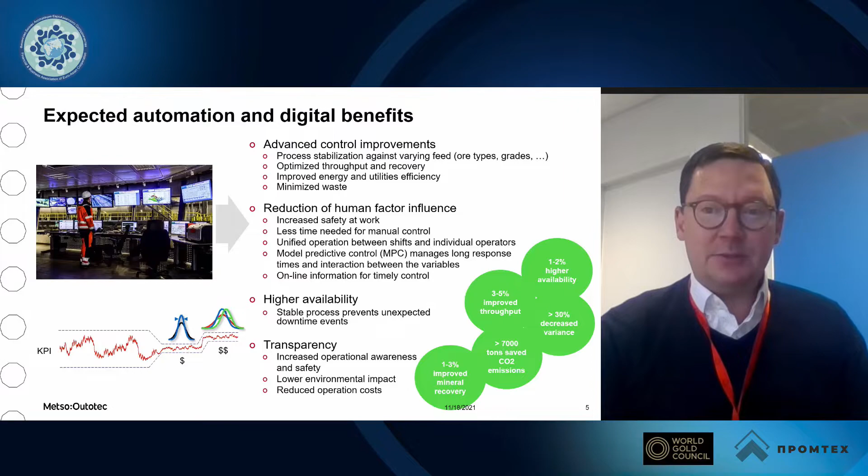By proven results, we mean that we have references and measured customer cases where we can show these results happening.

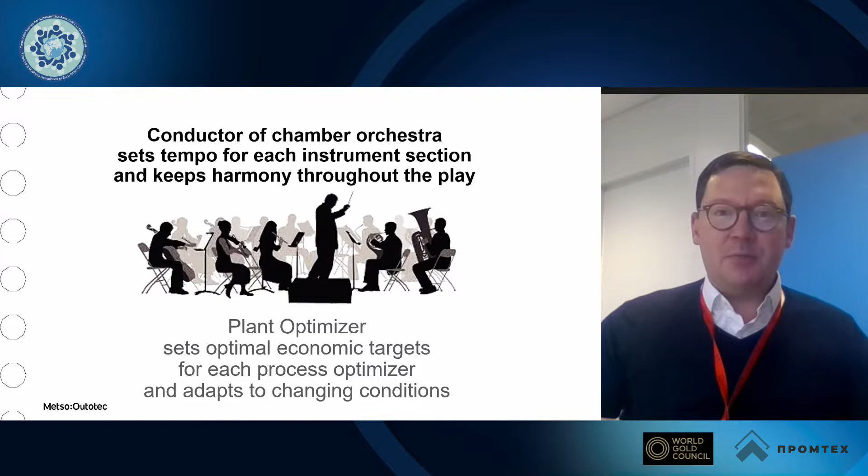A plant optimizer can be compared to a conductor of a chamber orchestra, who sets the tempo for each instrument section and keeps harmony throughout the play.

Such a conductor of an orchestra can be a plant optimizer, which is a metallurgical digital twin. This metallurgical digital twin relies on different process optimizers, each delivering the process optimum and the results expected from them.

So a plant optimizer simultaneously and continuously adapts to the targets to achieve the optimized output.

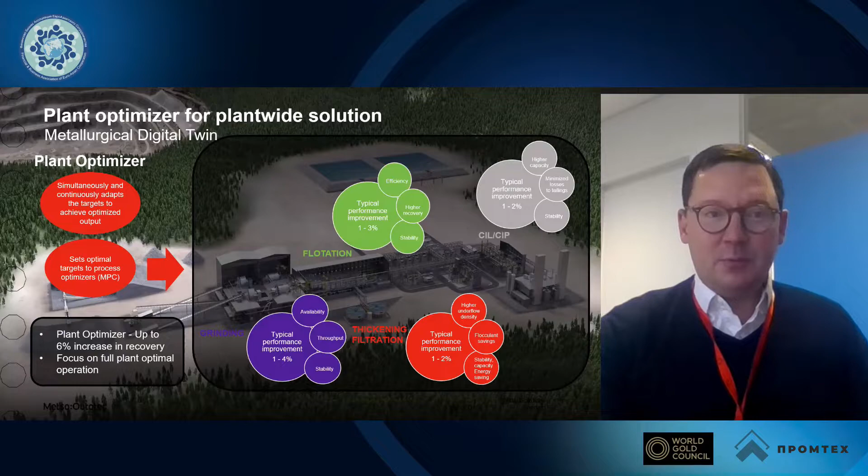Then we can introduce the metallurgical process twins, as a digital twin is a digital representation of a real-world entity. It is a software object or a model that mirrors a unique physical object, by definition.

A metallurgical digital twin as a plant optimizer measures raw material, process state, production value and costs, and of course inputs that to the process optimizers.

Now, when we introduce the digital twin to the control of the optimizers, we can get feedback from the process and input that back again to the real life plant, where we can predict and optimize the process further.

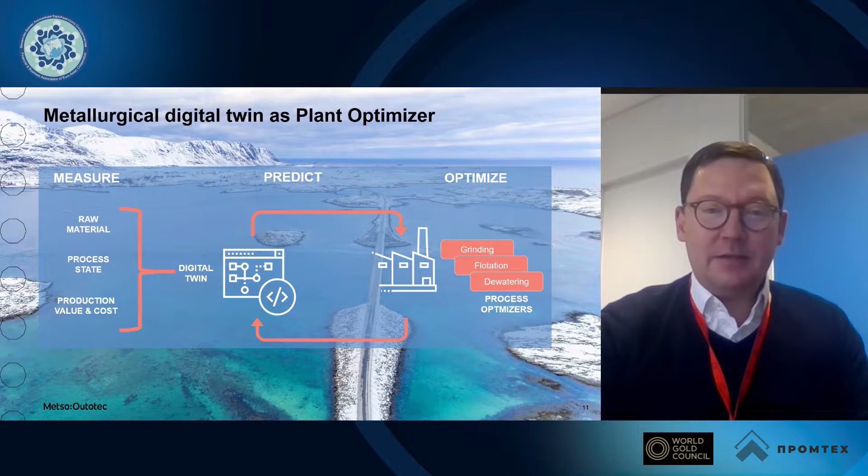When looking at a real life example, we can see what it looks and feels like. So we have different measured and proven scenarios and models of how the real life plant works at different optimums.

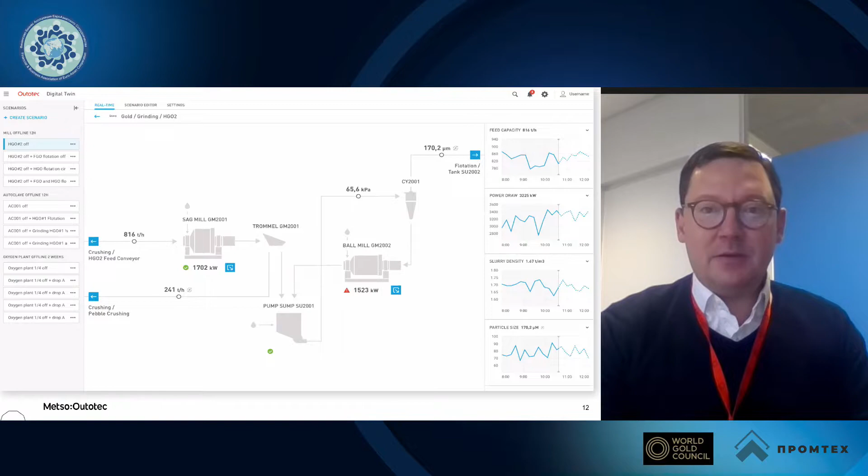And we can run the plant and measure it online, in real life. So what we do is create a static or dynamic process model, which is adapted online to track the plant response.

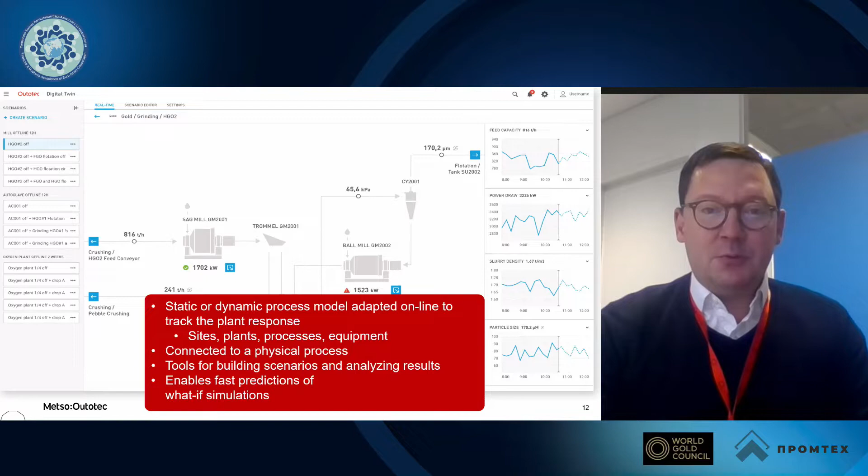The model is connected to the physical process, and we provide tools to build scenarios and analyze results. This enables fast predictions of what-if scenarios and simulations.

We can, of course, measure the process history, but with the dynamic models and the digital twin, we can predict what happens if we change something in the process. This prediction is accurate, as the digital twin is a replica of the real life plant.

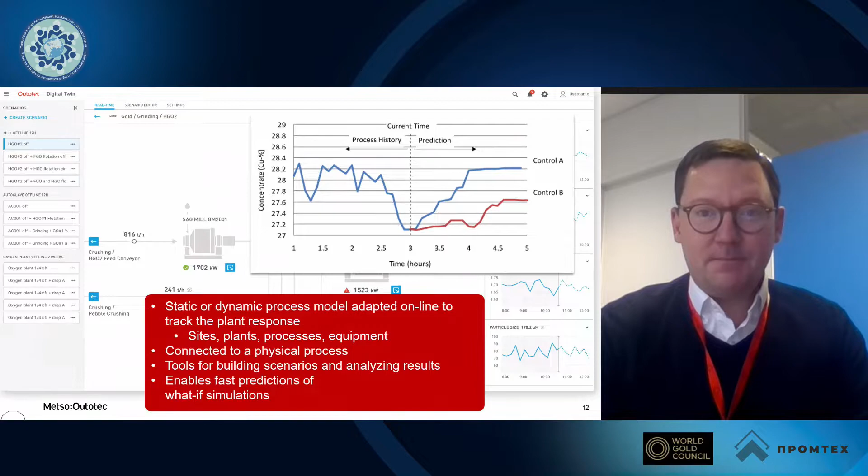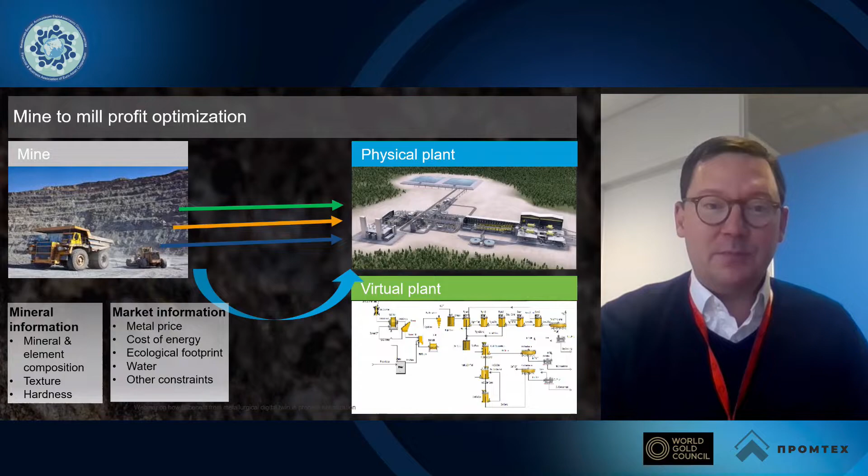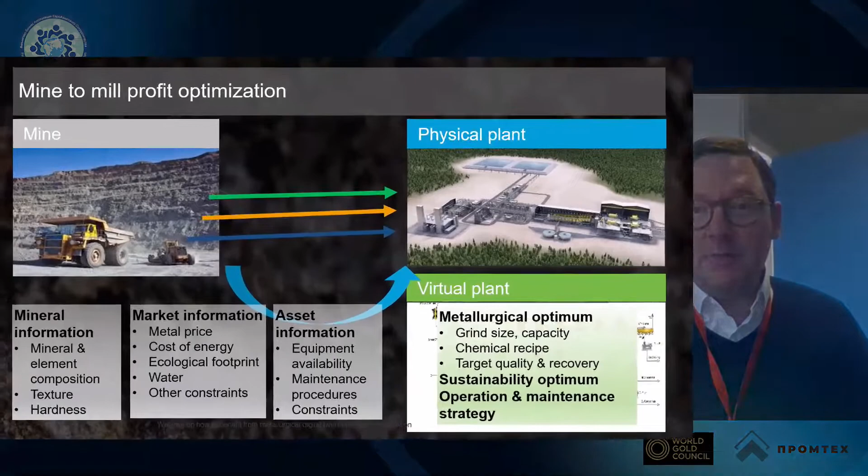The mineral information, the mineral and element composition, texture and ore hardness, market information like metal price, cost of energy or reagents, ecological footprint, water availability and other constraints, and asset information is delivered to the virtual plant, where we reach the metallurgical optimum and sustainability optimum, whatever that might be in the specific case.

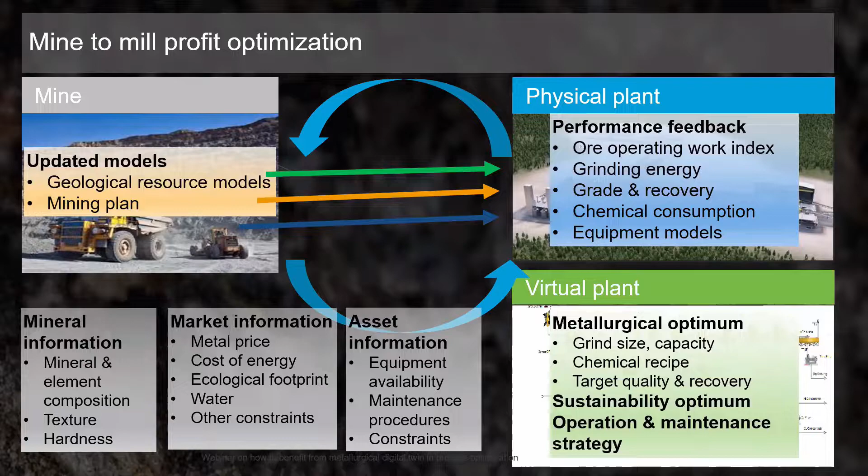From the physical plant, we can get performance feedback, and again, in the mine operation, update the models in the geological resource models and mining plan. I believe you have received the presentation from Sandvik covering exactly this part of the optimization.

And this results in the economic optimization of the site, or the operation, or the company itself.

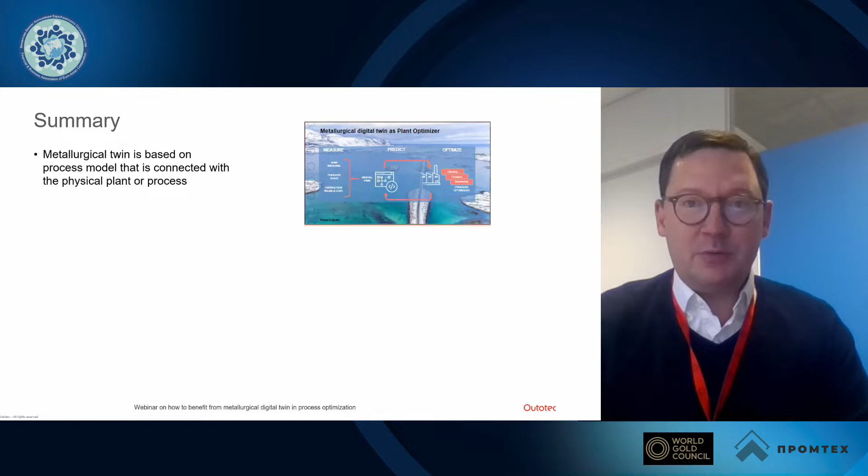So as a summary: the metallurgical digital twin is based on a process model that is connected with the physical plant or process. The metallurgical digital twin can be leveraged in versatile plant optimization tasks and therefore has significant value generation, which is possible through operations efficiency improvements.

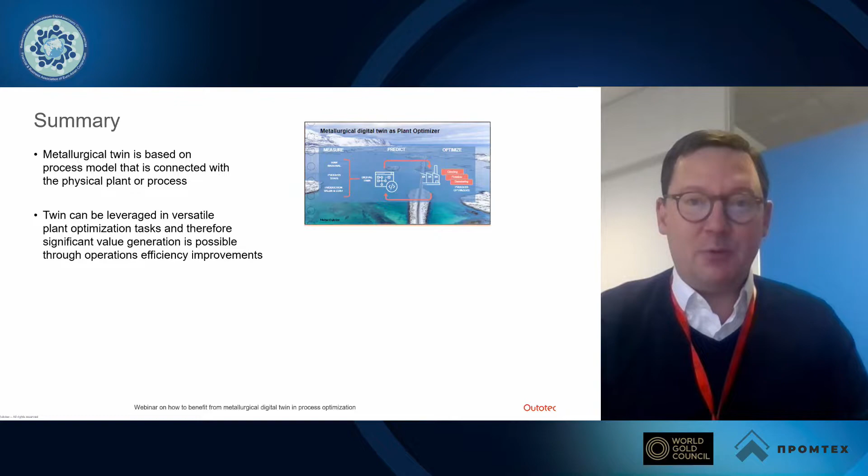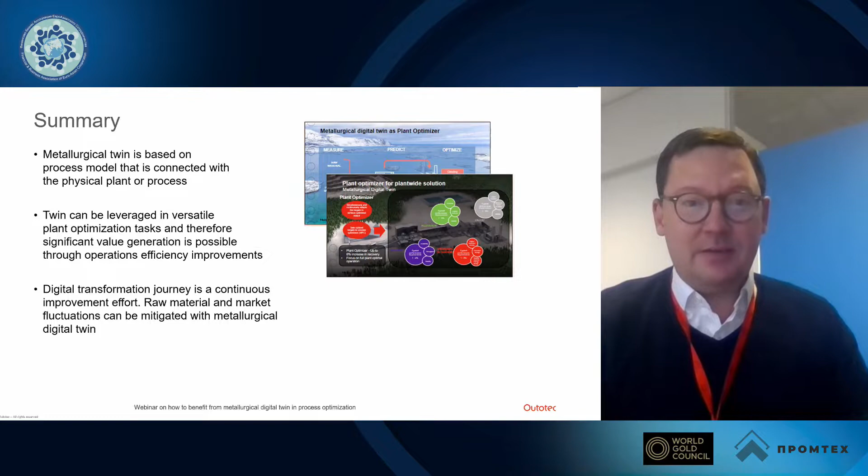Important is that digital transformation journey is not a one-shot investment. It is a continuous improvement effort. Raw material and market fluctuation can be mitigated with a metallurgical digital twin, and as a result, economic optimization for the site and business can be gained.

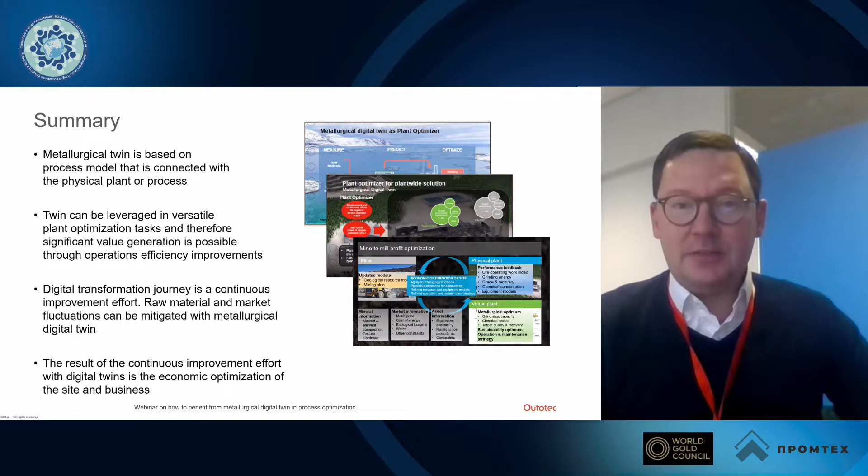This is a very short 10-minute presentation and a brief teaser for the metallurgical digital twin and what we can do with such technology. We are delivering this technology at the moment. This is not science fiction. In Russia, we already have several customer cases ongoing where this kind of technology is being implemented.

Thank you very much. And as always, I'm happy to receive any questions.

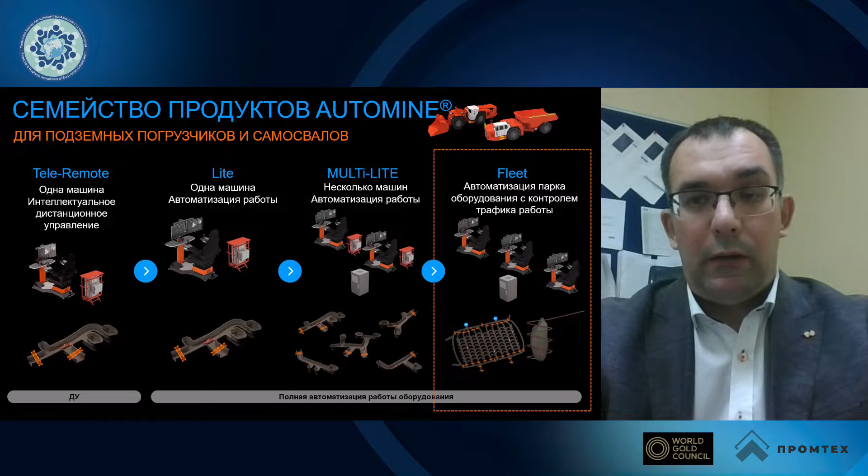We also have solutions for automatization of the drilling equipment, and this direction is also developed by us. The decision can be as simple as remote control of one unit, when the operator is constantly sitting and distantly controlling the work of the truck. It can also be fully autonomous work of the vehicle, when the operator just puts the end point of movement and the vehicle moves through the mining channel, making the program function.

This year we also launched the first project in Russia, in Norilsk Nickel - 2 trucks, and they work.

If we talk about Norilsk Nickel, it's too early to talk about results - we just implemented the system. But I can give examples of implementation at foreign facilities and companies. There is a most picturesque example of the benefit: this system on a gold ore site in Canada returned the investment back in 54 days.

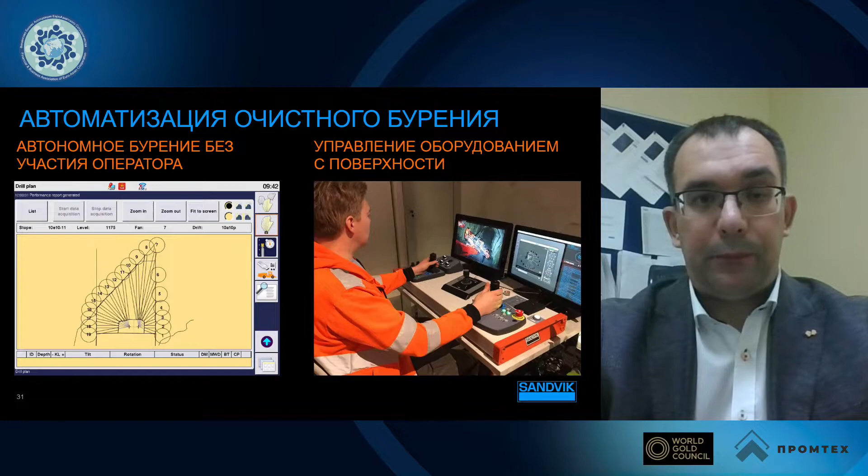In conclusion, I should say that Sandvik is developing, at the present moment, a new concept of the automatization system - an absolutely new type of equipment. It will be in 4 or 5 years. It will be a totally new vehicle, a new type of equipment. It will not be equipped with a cockpit for the operator - from the very start, it's supposed to be under the AutoMine system operation.

It will be equipped with sensors for 3D navigation. This means it can perceive the environment in a 3D model, and then be able to work together with people who are at the same block, at the same horizon. It will be equipped with AI intelligence.

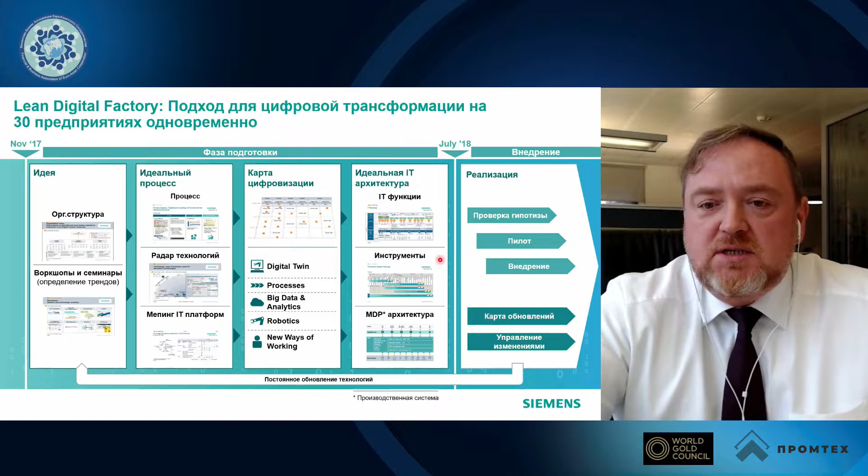Here you see all these 5 working flows which were mentioned on the previous slide. We established the ideal IT architecture, how we would like to see that, and we discussed all the tools which we need for the implementation.

We defined what is most important - the architecture of the production system, how we will measure all this, how it will be controlled. In 2018, you see that practically we needed 1 year for the preparation, and we moved to the implementation after that.

The implementation goes through the standard methods: the hypothesis check, the launch of the pilot project, and the enlargement of implementation on the whole factory.

But we understand that time goes fast. We have new technologies. That's why we always consider the map for update, and the update, the new technologies, brings us back to the thoughts and repeats the process. If we have something new, something that is significantly changing, this is the way we have undergone, and what we face, what we see.

For me, this turned out to be a revelation, because if we compare the structure of our costs before the digital transformation and after, it looks like this. Per unit of the product, material expenses were 65%, and 15% were direct costs of our personnel, then 5% for engineering, capital expenses, and other expenses. So this was the structure of expenses - about 80% of our product costs were variable costs connected to the produced equipment, and 20% were fixed costs which did not depend on the amount of issued products.

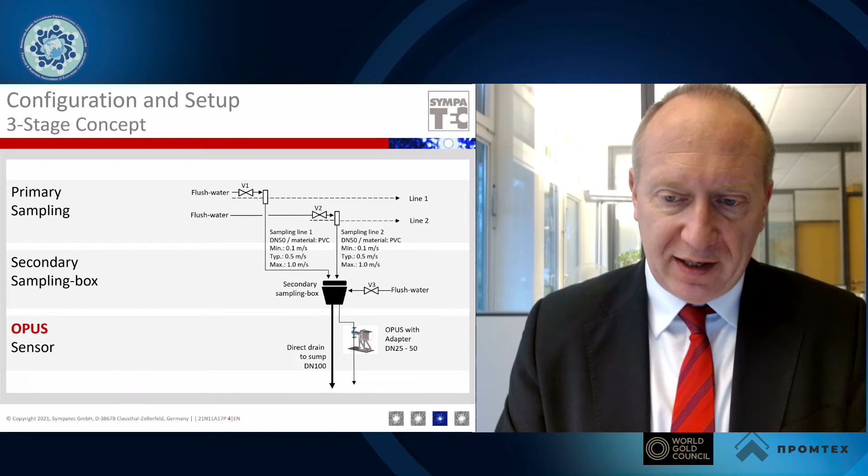Typically, the configuration of our equipment and setup is a three-stage concept. We have a primary sampling where the sample is taken from the process line, for example after a hydrocyclone. Then the sample is transferred to the secondary sampling box, and from there a part of the flow passes the online particle size analyzer, which is based on ultrasonic extinction. The entire system looks like this.

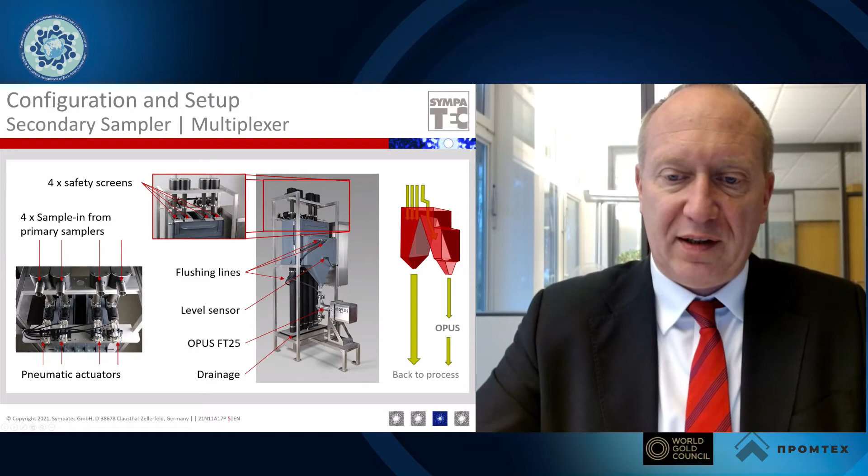You have a so-called multiplexer, which is used to connect the online analyzer to up to 4 streams. So you have the sample inlet, flushing lines, level sensors, and the Opus sensor that does the online real-time measurement.

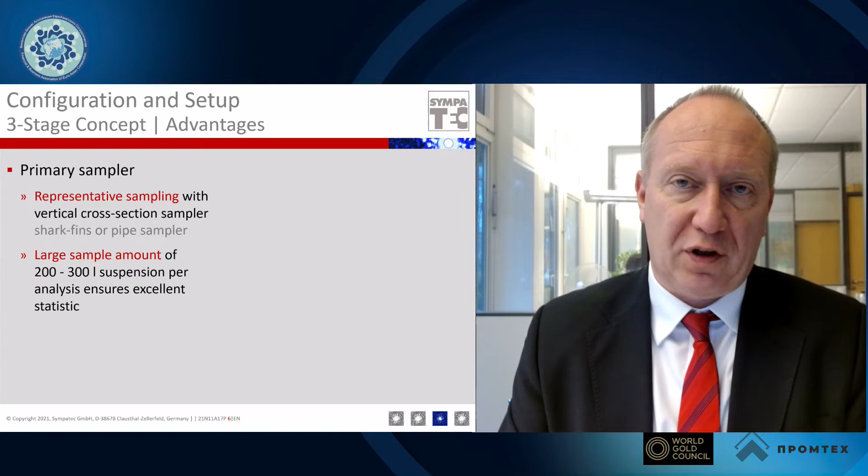With this 3-stage concept, we have certain advantages. The primary sampler ensures you get a truly representative sample via a vertical cross-section sampler - these can be shark fins or pipe samplers, with different options. This gives us a very large sample amount, something like 200 to 300 liters of suspension for each analysis, ensuring excellent statistics.

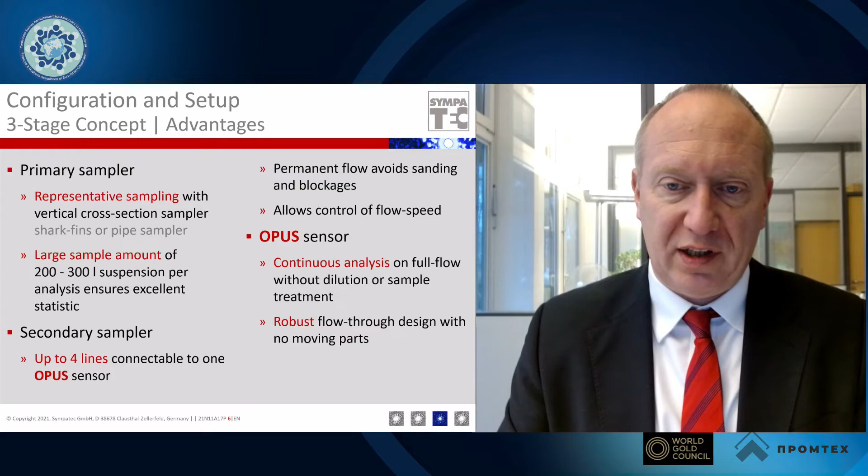The secondary sampler is basically a multiplexer that connects up to 4 lines to the Opus online particle size analyzer, ensuring we get the correct amount for analysis. We have a permanent flow without any stop, avoiding sanding and blockages, and with a multiplexer we can control the flow speed through the analyzer. The Opus sensor measures continuously, giving real-time information on the full flow without any dilution or sample treatment. It's a very robust design with no moving parts for dilution or abrasion or anything else.

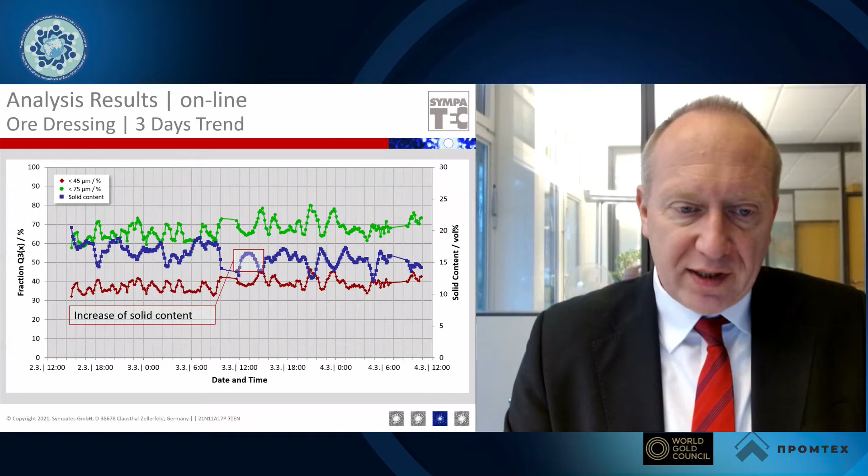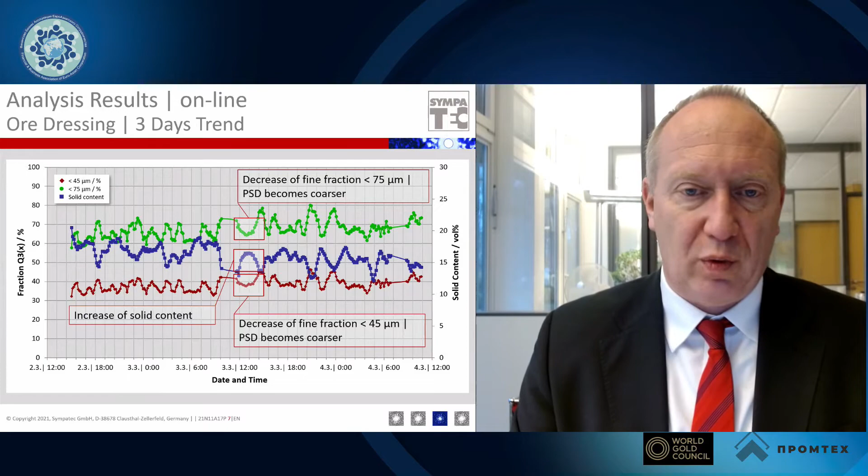Here you can see at this point in time, for example, the solid concentration has been increased, and an increase of the solid concentration immediately decreases the fine fraction and also decreases the 45 micron value. That means the particle size distribution becomes coarser. With this knowledge, you can interact - you can play with the process parameters you control to bring the particle size distribution, the fineness, into the range needed for the subsequent stage of flotation or whatever comes after that hydrocyclone.

From the previous slide, we observe that an overloaded mill - if you increase the solid content too much - can be detected, and you immediately see the particle size distribution values decrease, meaning the entire product becomes coarser. So as a conclusion, overcharging a mill with too high a feed rate at constant energy generates lower mass-specific comminution energy, which reduces mill efficiency on the minerals. If the solid content and particle size increase, this may influence the efficiency of the subsequent flotation, and there's always a danger of sanding the flotation cells.

But using online particle size analysis can clearly avoid this kind of thing from happening, because you have online monitoring that helps you avoid those process disturbances.

So very often we are asked, how does the online particle size analyzer Opus, which is based on ultrasonic extinction, correlate with other technologies? Very often people are using sieve analysis, and here you see how we can match the Opus system with existing analytical technologies, for example, sieving.

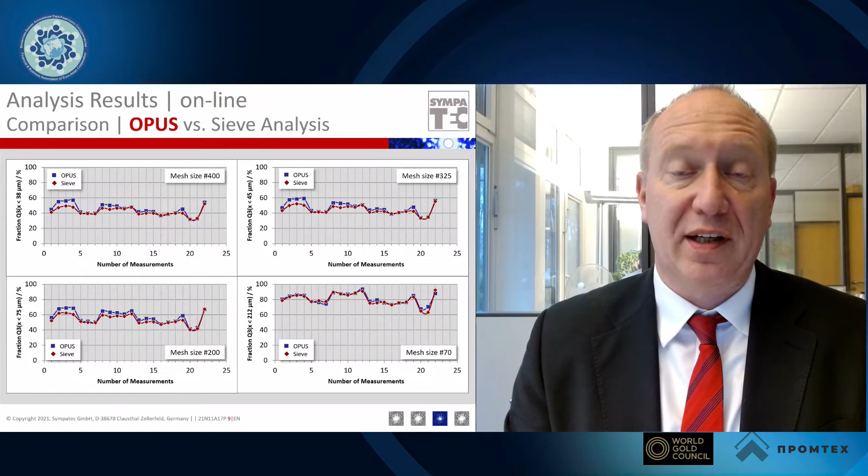So here we are looking at the number of measurements as a trend, and we are comparing the Opus results to sieve results at certain mesh sizes. You can see that the match between those different mesh sizes is really excellent, for 400 mesh, for 325, for 200, and even for 70 mesh. So we are able to match the Opus result to something that our customers are used to, which is known and already established.

There are very interesting or very important application strengths when it comes to measuring online particle size distribution for ore dressing. So we have this three-stage concept with the Opus that allows measuring particle size and solid content in real time to control the process.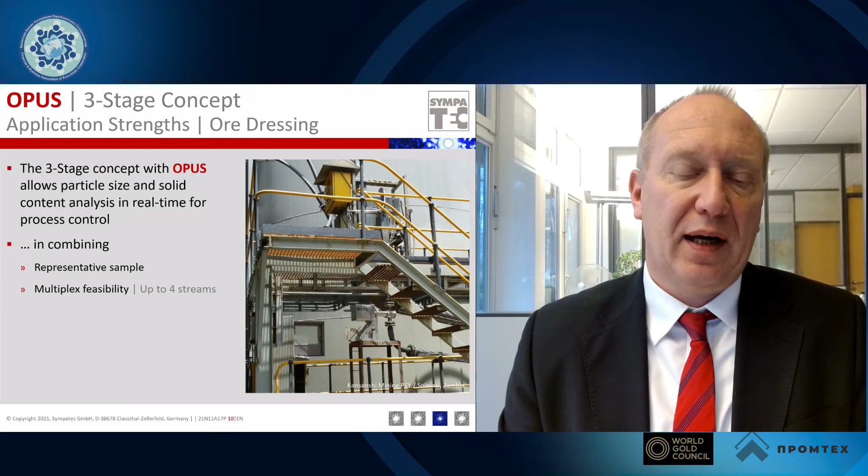And this can be combined with representative sampling, which is very important because our customers usually have more than one stream. They can use the multiplexer to connect up to 4 streams with this multiplex feasibility. The entire system has a very robust design, so it's designed to be operated in a harsh environment. The installation is rather simple and the handling as well. We have very good comparability to other established methods, for example sieving.

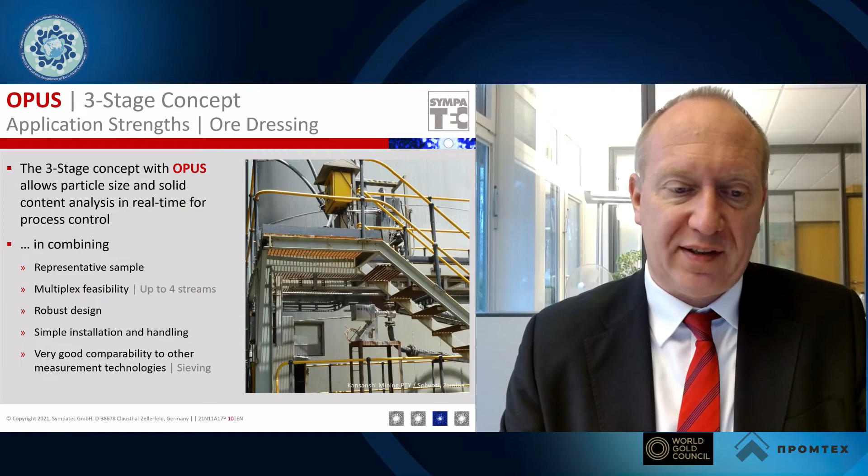I'd like to extend this invitation to see us here in Clausthal-Zellerfeld. We are open for visitors as far as this is possible under the current restrictions regarding traveling, but we are very welcoming here to visitors from all over the world. So welcome to our Pulver House, which is the Innovation Center for Particle Measurement.

And this was my short presentation about this technology and how we can support, let's say, processing of ore and minerals with our technology. We recently see very high interest and also good order income from Russia. So that kind of builds the bridge here between this technology and the demands that we are seeing from the Russian market. Thank you very much.

Thank you very much for your report. I would like from my side to say that the company Industrial Technologies, using your technology, has received very good impressions from all the analytical systems which were already launched, and they are now working in an automated profile. We would like to wish your company great success not only in the Russian market but also in other markets where you are present, and to thank you for the level of technologies which you are providing to our industry. Thank you very much. Thank you very much. Thank you. Thank you.

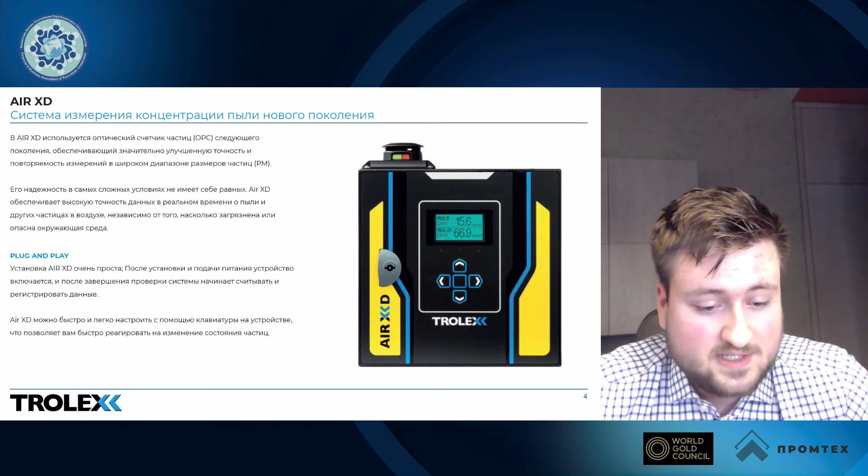One of the differences of this equipment is the simplicity of installation. To start the work of AIR XD you just need a power supply, and then it starts to register and calculate the data. Despite being simple in its process, the system provides lab-level precision.

Using breakthrough methods together with patented algorithms, AIR XD is able to achieve a level of precision normally used only in high-level lab equipment. The simplicity of its use and robustness is significantly increased because pumps and filters are no longer needed.

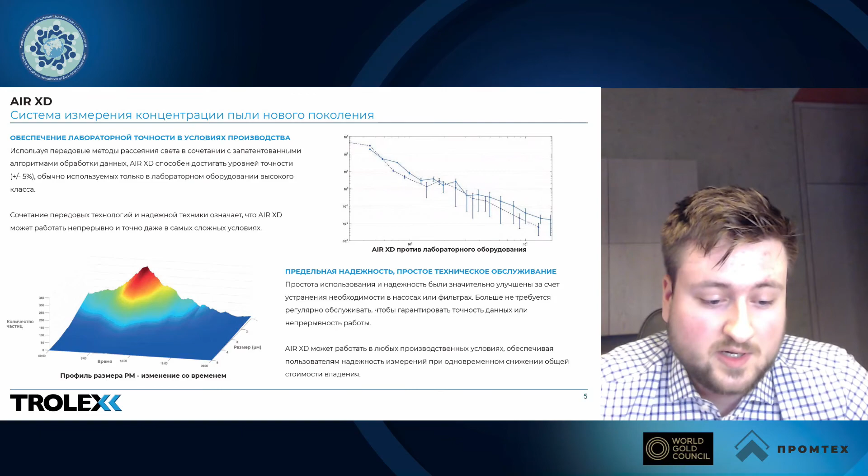The equipment does not need regular maintenance, and AIR XD can work in any production conditions, providing reliability while lowering general costs. Another direction facing digital transformation is control of movement underground.

This system provides, in real time, monitoring of the movement of the ore throughout the whole shaft. The automated monitoring provides control in real time and increases the level of safety of the work. Independent assessment shows a reduction in the amount of trauma by 65%.

And it's easy to adjust.

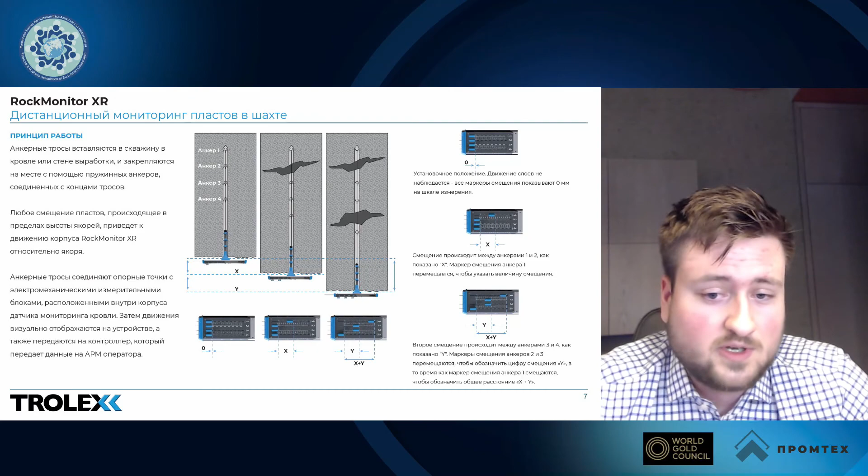This gives the information to the display. The gathering and analysis of the data has a very important task with the Trolex core application, providing warnings about the movement of the layers and ensuring safety.

The data can also be used for future work, for example in the system of anchoring, for planning future work, and so on.

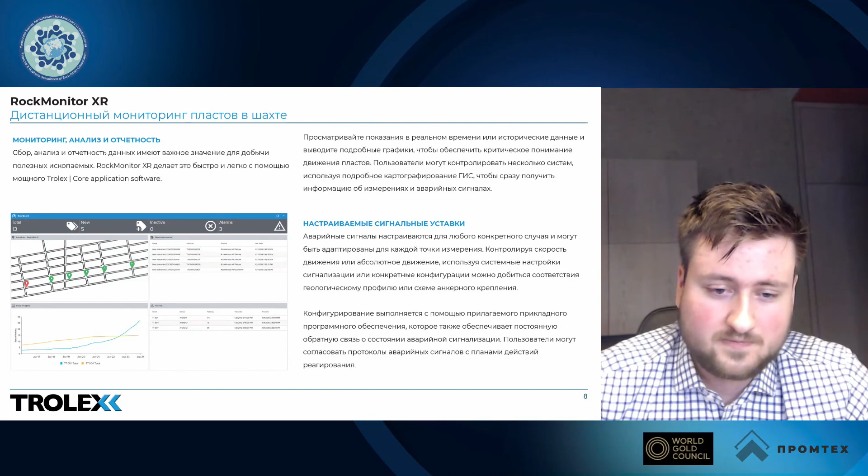Thank you for this interesting and informative report. These two technical solutions, which today we introduced on behalf of the company, occupy a very interesting position, especially the measurement of dust contained at workplaces and in the air. We have heard that there are also regulations in legislation about dust content in this regard.

This device is very interesting. It exists as a stationary kit, which Anton told us about in his report, and also as a portable option, which provides individual protection of personnel against dust.